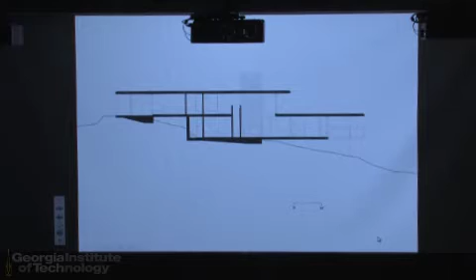What was interesting, I think, that forced this piece was this incredibly intense and steep topography. So the idea of being on this site, or resting on it comfortably, required this grade change.

So the building is basically 2 stories. There is some excavation in this area here, but otherwise everything else is pretty much on grade on the upper level, west side, and on piers for the rest of the building.

The programmatic piece of this—I'm going to show 3 houses. All 3 houses are of the same type. They're all retreat houses, about reinventing your life in a place that you resonate with. These are people who bought land for a particular reason, because it speaks to them in some way, and the idea is they're not looking for their normal daily life on that space. So it's about creating a different kind of life, a sort of anti-functional life.

You have this entry door here. The kitchen is just 2 low bars, nothing that would interrupt your connection to that landscape. Above it, you come in and turn, and then there was this very intentional idea of coming in, turning around, and then coming back, so that you have this frame of the stair framing what they call in Maine the bold ocean beyond. Then the upper bedroom, and tucked below, past the living room, is the guest bedroom down below. So the house was really sort of programmatically inefficient. It wasn't about creating efficient spaces—it was about always reminding yourself, as you go through the rituals of everyday life, that you're in this place.

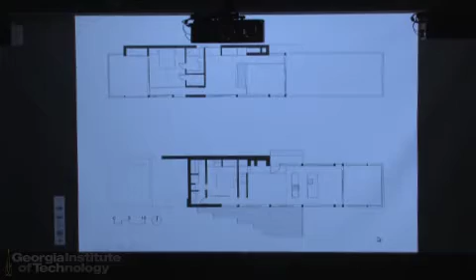And so here it is. We talk about it as this sort of tiny building in this large landscape. It was published in a German magazine where the writers talked about the mutual intensification of site and architecture—the idea that there was this dialogue between the site and the architecture itself, so they're mutually intensifying one another.

There was an intentional idea of putting this mass wall construction in the back, and the more fragile structure facing the ocean. So there was this anchoring piece—it wasn't all about exposure, but it was a lot about exposure. We had a structural engineer who stood out there on the deck and said, 'Oh, I get what this house is about. It's about the ferry boats,' which I thought was, okay, fine.

So there you see David having a meal in the dining room, and next to him are the simple bars of the kitchen. Mary Beth, who is a fantastic chef, was just not about creating elaborate meals here. It was all about this sort of simplicity and just being in this place.

Interestingly, it's a marine environment, so you can see some of the bracing below to laterally stabilize the house. Everything had to be stainless steel on the exterior because of the corrosive marine environment. So this is truly a threatening landscape.

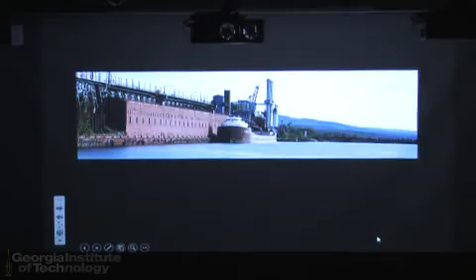This one is probably maybe a half mile, quarter of a mile from the house itself. And so there's this really powerful industrial culture up there that I think is not only powerful given the lake, but is also very culturally significant to the identity of people that live in this area.

So this is the site plan for the house. It's not 57 acres and a mile of coastline.

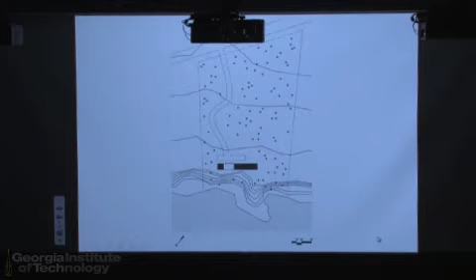It's about 2.5 acres, gently sloping and then rather radically sloping down to the water. So you can begin to see this. Behind us are the Sawtooth Mountains, and you can see that this is a bit of wetland. Now this is again very, very rocky shoreline.

These wetland areas are very important to catch and retain the melt from the winter snows off the Sawtooth Mountains. I went to school in Colorado, these are not really mountains, but in Minnesota, they're definitely mountains. So we'll go along with that.

So this goes into some of the sustainable strategies for the house. This was meant to be very simple living, very direct, not too complicated. So we have a white roof and black floor, the white roof deflects the summer sun, the black floor absorbs the winter sun, and really does an amazing job of heating this building in the winter. It's pretty astounding. We keep the temperature at about 45 degrees while we're not there.

And we don't have one of those cool things because there's no internet up there yet. So we have to come in and it's 45 degrees, and if it's a sunny day in the winter, it can be 80 in the house. So that's pretty extraordinary in Minnesota to have that kind of passive heating. If it's not a sunny day, we build a fire really quick.

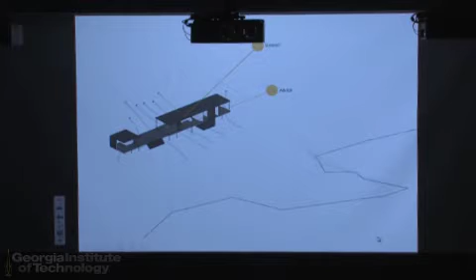And then for the summer, there are large 4-foot by 10-foot panels of sliding glass. With the body of water that's probably no more than high 60s in a good year, you have an immediate cooling effect with the winds coming off the water and cooling the house.

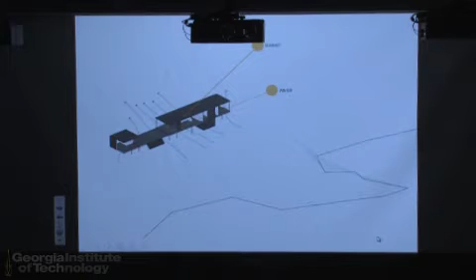So this sort of explains the diagram, the idea of the house being a minimal change to the hydrology of the site, so that we're still allowing a very slow movement of water as it moves down to Lake Superior. Had we built this entire piece down on the ground, there would have been an incredibly large detour as you go to the water, and we wanted to maintain that hydrology, to maintain the plants in this front area, in what we call the front yard, which is not a yard at all.

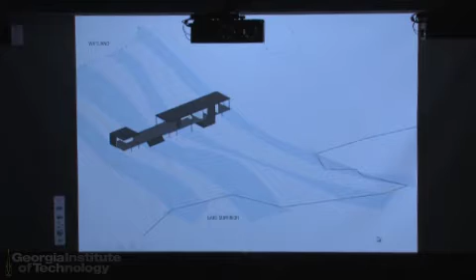So this is the house as you approach, a very calm sense of the main house, and then a gap, and then the studio that frames the water beyond, and a sort of diagonal view toward the end.

This is again an attempt to be a little stealthy in this landscape. When you're building a black house in a white landscape, it seems awkward to call it stealthy, but I think the idea of this black is actually kind of powerful in that landscape, and yet not overly out of place.

And then the front view really shows how much glazing we have facing the water, and then the interior in a very simple way, with an enormous amount of storage on the north wall that allows us to remove the detritus of everyday life and put it away, so that when you return to the house, it's quite fresh, and then it gets reinvented with whatever activities are taking place with the new visit.

A very simple diagram for living. The long table was actually inspired by a visit to a neighbor's house who had a historic cabin that had a long table and this sort of panoramic glass.

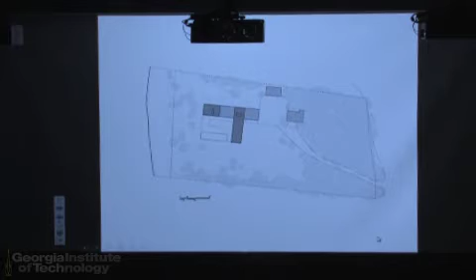The idea was to create these interlocking L forms, with the public area on the first level. Up above would be the adults closer to the lake, and then the kids' spaces perpendicular to the lake, anchored by these pinned stairs.

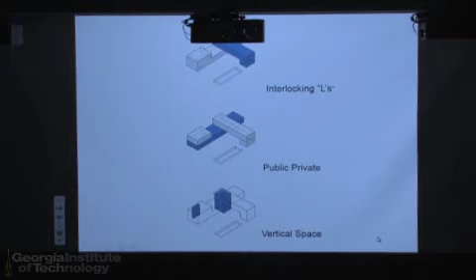So here's the plan—a very simple plan, no particular formal quality to it, other than to really allow a sense of coming into the house here.

Coming in, you would approach this way, see this panorama, this portal, turn, and then this became this telescopic view. If this was sort of a frame view, this was more of a telescopic view toward the lake. And then this amazing stair, I'll show you in a second, that really opens up to the sky.

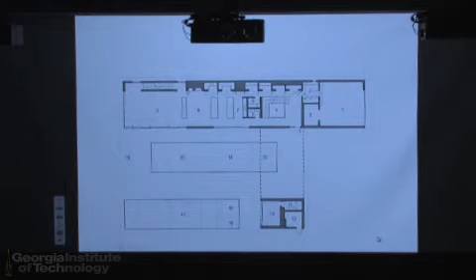So this sort of exchange of views of the house, and then the parents' wing on one side, with the parents quite separate from the two girls' bedroom.

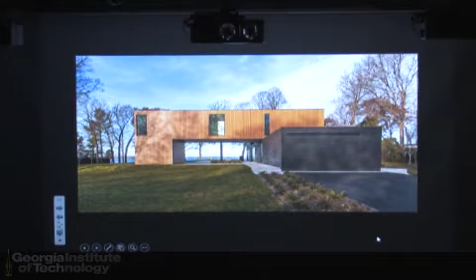So here it is—this is the approach, and then just coming into that courtyard, where all the family activities begin to take place. Another shot of that.

It was very important to us to render these two L's in different materials. And then the stair—we've got a great video of dropping the stair in sections through the opening in the roof. It's a steel stair with wood tread.

Two girls' rooms above, and then a little room off the pool for changing and showering—it's technically a guest room, but it's quite small. As it got smaller and the pool equipment room got bigger, they just said, okay, now they're staying just one day, now half a day, now just here for a couple hours—this is perfect. They were really cool about it.

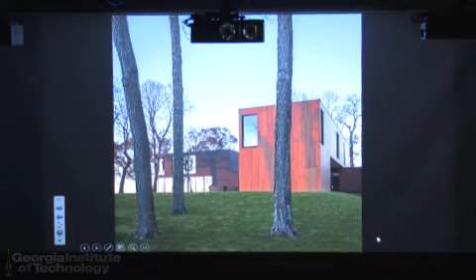This is a friend of mine that does extraordinary art and really genius placement, I think, of that piece. I'm looking at the tower.

I didn't know I had so many images of this project.

Again, keeping everything pretty low so that you're constantly in this environment. And another great wall of storage - this was actually quite a bit deeper than our project. What's interesting is it becomes rooms in and of themselves. There's a bar, a pantry, refrigeration, and all that stuff is concealed within that wall, including the fireplace, which is next to the dining area.

So this project, I think, is the end of the houses. But I wanted to show this - it's our Atlanta project, except it's in the Iron Range of northern Minnesota. This is for Delta Airlines. And what's interesting about this project is it's a very banal building and program, but Delta really wanted to do something different.

Which I thought was incredible. So we were not going to go after this project at all, but we were convinced by a phone call that we should go after it. They basically were challenging architects to help them reinvent this call center in northern Minnesota.

This is one of the most dismal buildings and places to work you've ever seen, but there is a huge unemployment factor in northern Minnesota. So economically, this kind of thing is really a boon to the area.

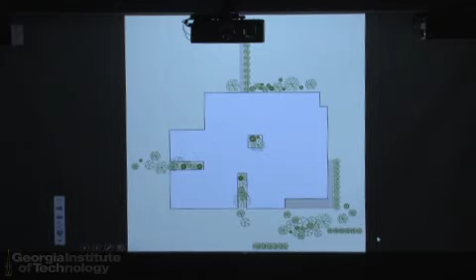So rather than looking at this in a way that was all about the restraints of the project, we immediately said, okay, what would happen if we really created a connection to this landscape that was really powerful, so we could create these sort of miniature gardens that we would cut into the space that would really recreate the North Woods.

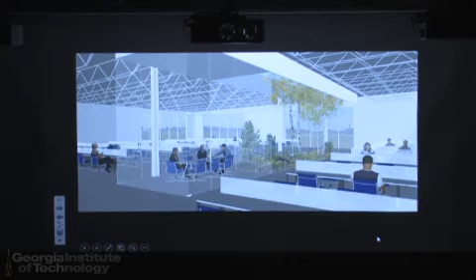So we did a series of diagrams that proposed this and sold that to them as a strategy for the building. What we were very concerned about was that even with $6 million, you're not going to get these kind of openings in the building, so we ended up using a good amount of natural materials in the project.

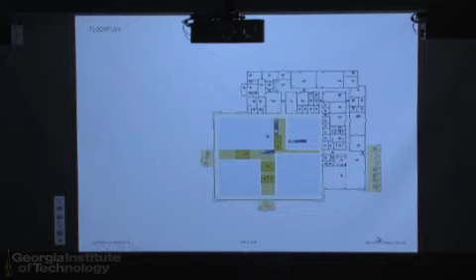They wanted it, but they still wanted to maintain a rather low budget. So we ended up saying, okay, what if we create these as conference rooms? We create these sort of bands of collaborative areas that would be top lit by a few skylights, and then remove the ceiling and paint everything out.

But then use a 3M photographic material that we would surround those conference rooms with - a vision of a courtyard or actual photography from the area. So we were creating, in a sense, this sort of simulation of a landscape for the conference rooms.

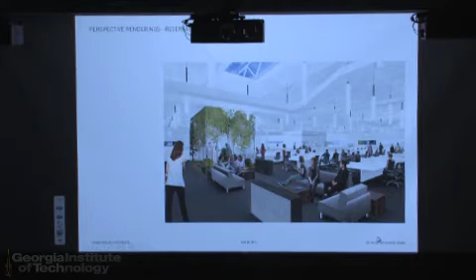And then we had an idea that we would use a sort of lenticular image as you come into the space, where as you come into work, you see the Delta brand of the sky, and as you leave, you see the image of the birch trees and birch forest that represent the north, the Iron Range area.

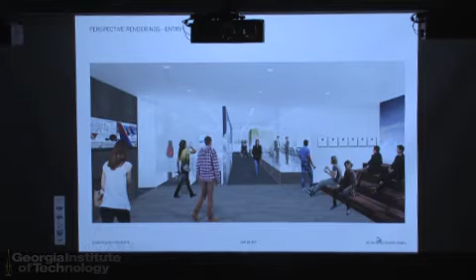So here you see the entry space, you see the lenticular wall. This is as you're coming in and moving into the call room floor, and you're seeing just a tiny bit of a conference room beyond.

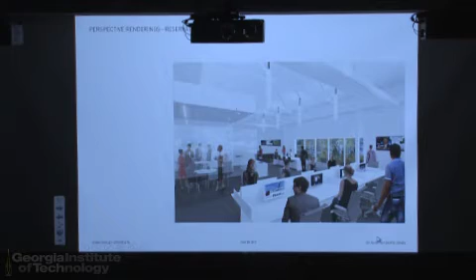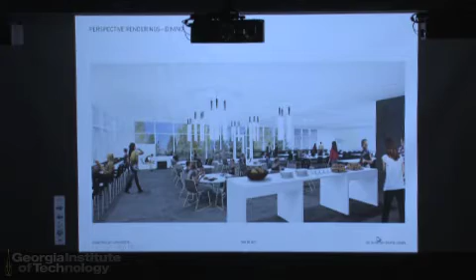And then we would increase the size of the windows and plant some landscapes out. Right now you just looked across turf toward a highway and landscape beyond, and then a more connected exterior lunchroom area, using steel plate and raw pieces of wood to connect to that space.

This is now under construction, and I believe that they're on target for delivering that project in several months.

This next project is one we're doing with James Corner Field Operations. For us, it's an incredibly interesting opportunity to work on a completely different scale. If that previous scale was about a tiny incursion into a pretty banal structure, this is on the scale of a mile-long street in Minneapolis, Nicollet Mall.

The idea here was to do this red piece that would connect the Grand Rounds to the Mississippi River, creating landscapes that move through the downtown area with amenities that would spur social activity.

Like many city streets, it's mainly an office environment. There are a number of residential buildings being built in Minneapolis, but 90% of the city is empty after 5, probably except for this stretch, where there are a good amount of restaurants, activities, and theaters.

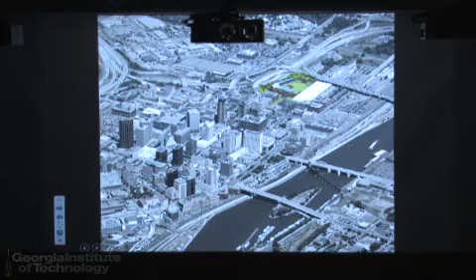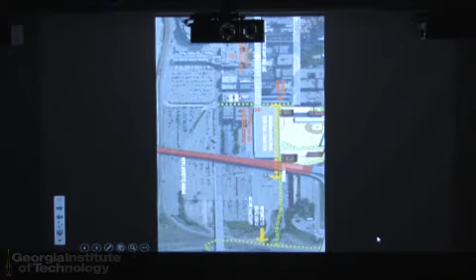Oh, I'm sorry, this should have been the opposite direction—I thought I'd turned that. So basically north is now over here, and this is very distorted, I apologize. I'll just move on. This is the transit line coming in here, north is over this way, and this is a new bridge that's taking place. This is literally all parking through here, and then the historic space of Lowertown here.

Back in the day, we started just doing something crazy—how would we do a ballpark? I didn't know anything about the required dimensions or anything like that; I knew how to watch the game, not how to play it. So we were sort of just doing something so they could get some money from the state legislature.

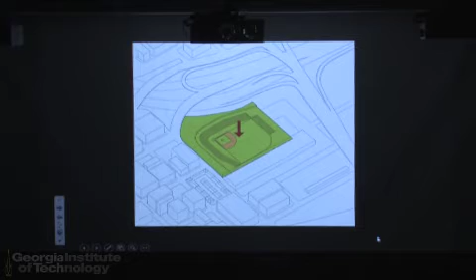The first conception was thinking about this not just as a ballpark, but a park. So the first idea was to take the area we were occupying and lay this green carpet over it. There was a very large industrial building being taken out, so there was a 17-foot hole in the ground when we cleared the site. What was lovely about it is it allowed us to depress the field so that the top row of the seating bowl is literally at street level. So you come in and have this opening up of the ballpark—the idea of depressing, pushing that playing field down into the earth, and surrounding it with the few structures that comprise a minor league ballpark.

It's not like a 70,000-person stadium project—this is 7,000 people. So it's maybe 30,000 square feet of enclosed building above grade: some concessions, a club room, suites, and a press box. And then we have a little tiny office building down in the corner here—that actually ended up going below grade. So all of the team rooms, everything, was below the seating bowl.

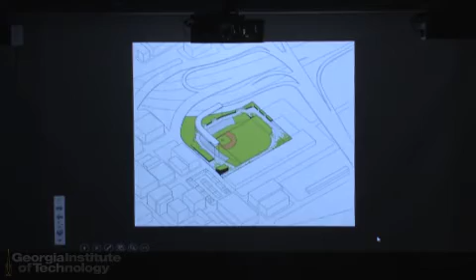So this was the entrance from 5th Street—you can see it opening right up. You're seeing the sign, basically opening right into the field itself—the upper concourse as you come in, and the bowl dropping down. And then the craziness of the concourse, which is interesting because it's 360 degrees.

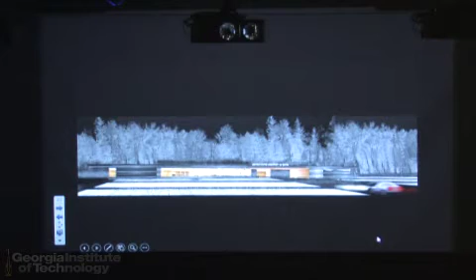It actually came out of the port director asking us, look, I've got this all figured out for you, you really don't have to do much work, we just need a log cabin. And we thought, well, probably we're not gonna do that, but interesting idea, let's see what we can do with it. And the officers are quite happy with it.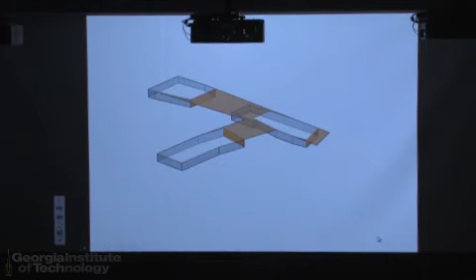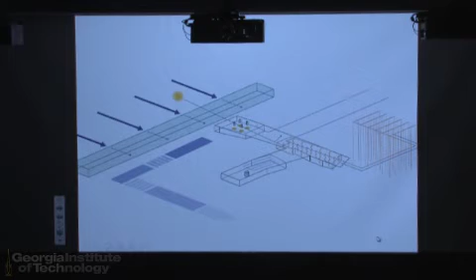So here's the conceptual idea of the port being about these cuts, about being this darker skin, and where you're cutting in, you're seeing that warm heartwood. It's about these simple forms that are inflected to make the easy traffic movements, and to allow better visibility from the officer workroom across the whole site so they can survey it, and then to create a natural way of mitigating harsh west winds coming onto the site, creating a protected area for port operations in the center here.

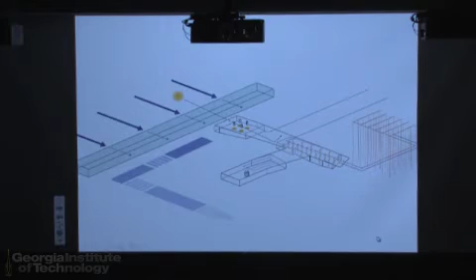So this is an existing band of trees, and this is the way we're collecting and then filtering water across the site. This is a diagram. This is one of the first land ports that uses a geothermal system for heating and cooling, and rainwater collection. Pretty much all of the strategies are employed here.

An image of the project across the wetland. This is an incredibly boggy area, I think we had like 80 feet of organics before you hit anything substantive. So it's entirely on piles, and a good amount of the roadways themselves are also on piles. I believe it's about a 10-inch slab for most of the drive lanes, because they were having differential settling on other ports.

It's a very interesting project type. Security is obviously a major concern, thus the dense grove of light fixtures. Their requirement was 100 foot candles across the entire port, which is crazy, it's just too much light. We've slowly, there's a ton of architects working on these ports, slowly building a little bit of common sense into the port operations. It's very hard to make a sustainable building that's putting 100 foot candles across 10 acres.

This was another sustainable effort, taking the end pieces from the canopy and using them for the counter and bench. And the canopy itself, this is the entrance, the pedestrian entrance. There are almost no pedestrians at this port. This is 7 miles outside of Warroad and a half mile from the border, just to get some competent soils, and I don't think they've ever had any pedestrians going through this port.

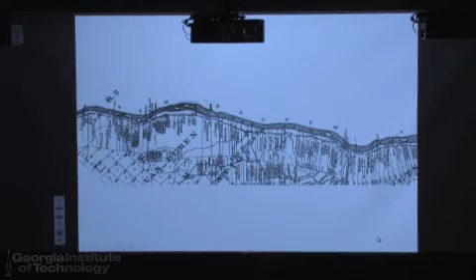So all of these things were part of our research exercise before getting into the park or the design. This was an early plat map of the town, which we thought was fascinating because it really began to recall the sort of long, thin pieces that you see around New Orleans and Louisiana toward the Mississippi River. You begin to see these land divisions based on everybody having a piece of the river, which was a connection to the exterior world.

And then this sort of powerful image of a forest and warm light beyond. So this was a development of the facade that began with the idea of camouflage and surveillance coming out of this North Woods image, but also a sense of that pattern that's prevalent in the culture with the blankets and the land divisions.

And then creating a metal skin that was literally three different colors of black, so it had this sort of patinated, elongated image to it. And then the glazing was also patterned in order to create less of a fishbowl effect for the officers in the evening.

So here you can see we literally took this same barcode Fibonacci series and patterned the glass. But when we put up samples of that in the office, every time you'd walk by, you'd get kind of a little queasy, because it had this sort of ripple effect.

And so over that, we overlaid this sort of literal camouflage image, so you could see in this area down here where you can kind of see that camouflage pattern.

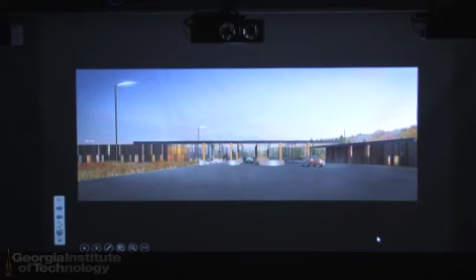And then again, the sort of slate as a layered slate and planted material. This is planted with blueberries. We thought that was pretty clever for Maine.

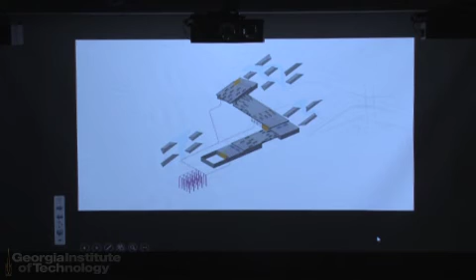And then you're seeing the secondary inspections. And then again, the idea of using the site as a way of moving water, moving it slowly in a pachinko-like action between these berms that recalled the sort of potato farming landforms that were used in that culture.

And then that moves into this sort of swale that takes the water down to the berm, which we cleverly called the security berm. So we could argue that it kept cars on the road, which is always important, I mean, Customs and Border Protection do not like port runners. They don't like people going off the road and getting out of town.

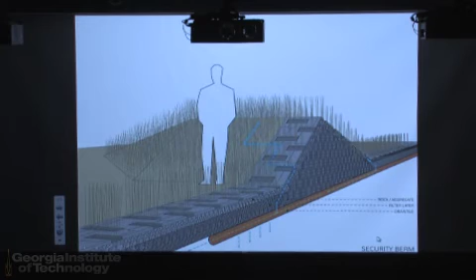So the idea of the security berms was a way of arguing that they were a necessary part of the security strategy for the site.

And then now we're getting into actual images, photographs of the site and the building. We were really interested in creating a skin that was quite taut and flush. So the idea of this smooth surface, where we were treating this as a very thin surface that was just about this rule set of the series of alternating metal colors and glazing, to create this sort of taut wrapper on the project.

And then it really opens up to the main officer work area, where again they need that sort of surveillance of the entire site. And you can see the sort of shaggy berms.

The port director was giving a tour, and she was talking about approaching from Canada to the site early one morning, and having just this incredible image, she had seen the trees with the warm sunrise, sunset, or whatever behind, and she said, 'It works.' She was super excited. It's kind of a nice thing.